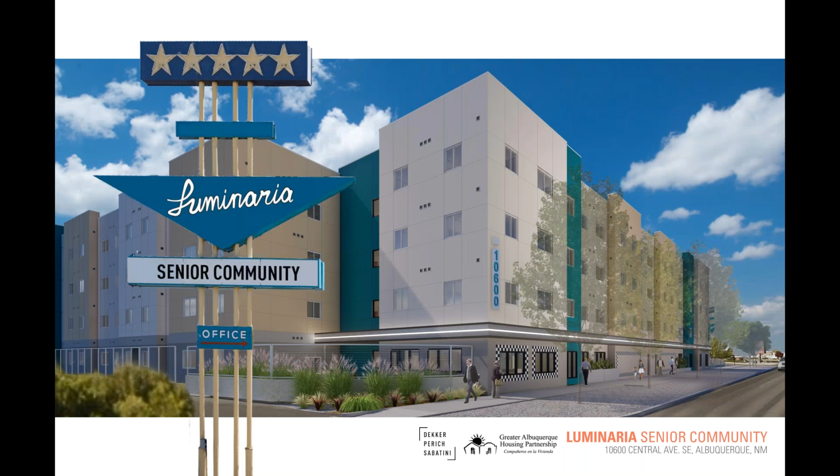Architectural, structural, interior, and landscape design was all provided by Dekker Perich Sabatini, with a long history of involvement in community affordable housing projects across the state. We're honored to be a part of this one with the GAP. My name is Hannah Greenhood, and I'm an architect with DPS. Again, honored to be here.

Civil engineer Isaacson and Arfman, Green Rater and HERS Rater, the Green Insight, bringing a LEED for Homes Platinum certification, along with a HERS rating below 55. Electrical engineering provided by AC Engineering, and mechanical engineering provided by NP Mechanical. A true collaboration amongst owner, architect, contractor, and the full design team throughout the entire process is the only way to bring us to today.

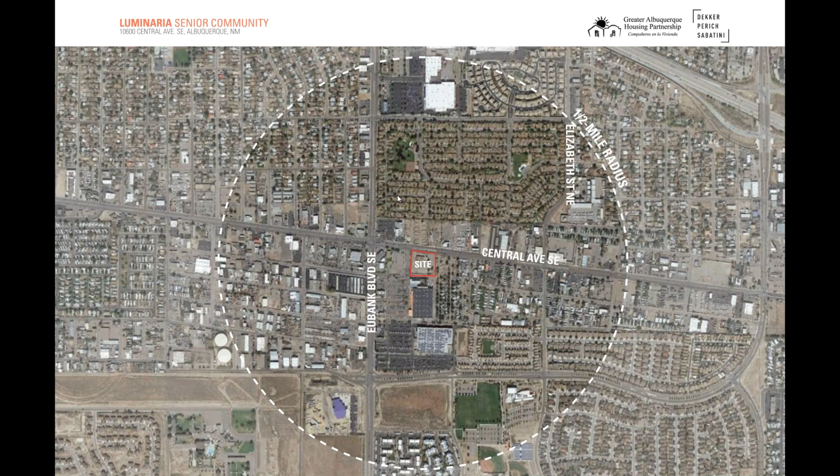On your screen is a graphic of the location of the site, Central and Eubank.

Most prominently, the adjacency to Central Avenue was a huge driver of the design of the entire project. An L-shaped 4-story wood frame building of 92 dwelling units lines and creates an interior parking court incorporating both visitor parking and a secured resident parking area.

Key features of the parking include added accessible parking spaces and a waiting and loading area allowing for pickups and drop-offs at ease, which is critical for this type of project with a resident population who may be in need of a bit more support for pickup and drop-off.

The site itself is flanked by 3 key site amenities: an entry courtyard, a community courtyard, and a dog park. All 3 of these elements are along an accessible walking path that goes through the building and outside of the building, encouraging active participation in physical body movement.

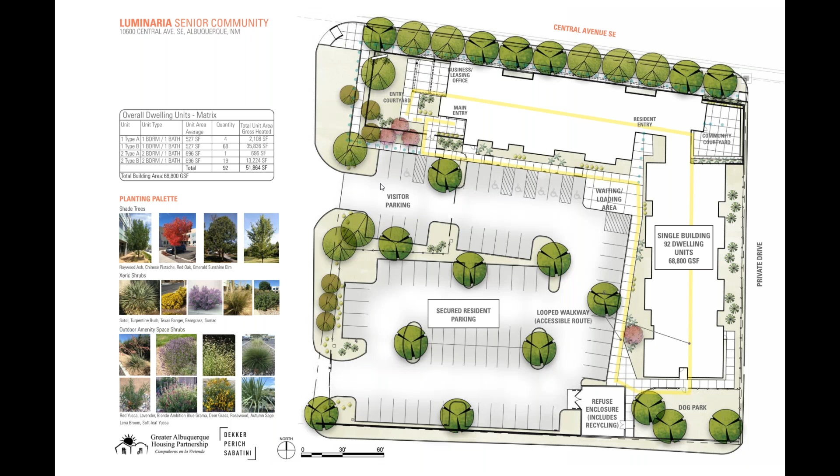Along the interior, corridors are lined with rails for that extra added support for a population in need of a little bit more support. A little bit more into those courtyards.

The northeast courtyard is the community courtyard that is overflow from a central potluck room that we'll see in a little while. The key feature there are uplit seasonal fruit trees along a circular outdoor patio with accessible movable furniture.

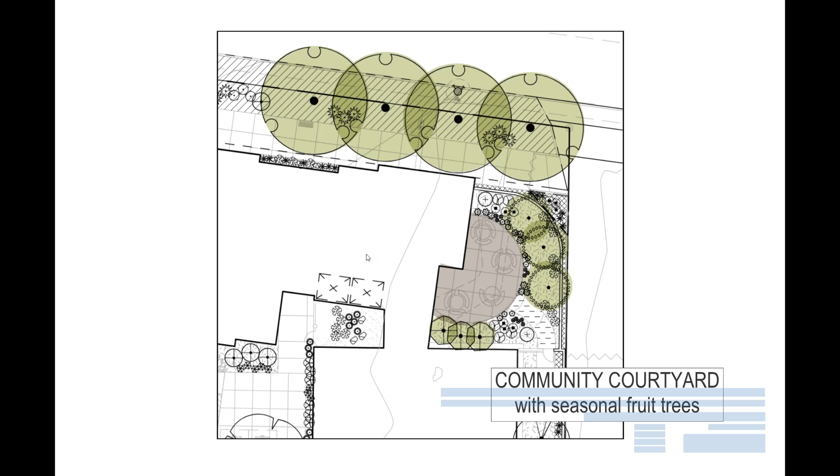For outdoor gatherings, on the opposing side, an entry courtyard with a loop trail that incorporates a therapeutic garden. Along that loop trail and along the entire site are opportunities for a moment to pause and rest with bench seating and shade, a really key component to the development of a senior community.

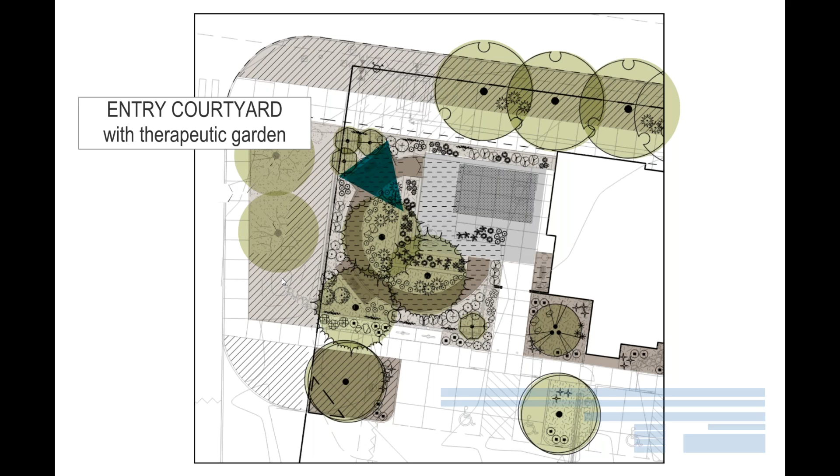On the outside of the building, that prominent Central Avenue face with deep roots into Route 66, trying to bring to fruition everything that the East Gateway neighborhood is trying to establish and bring back to this area.

Key components like a horizontal LED neon-like lighting strip will allow for some of those iconic images to be returned, but also to add some added lighting along the street front, encouraging people to walk down the street and engage. All of the amenity spaces line this front area, trying to activate Central Avenue for pedestrians walking by.

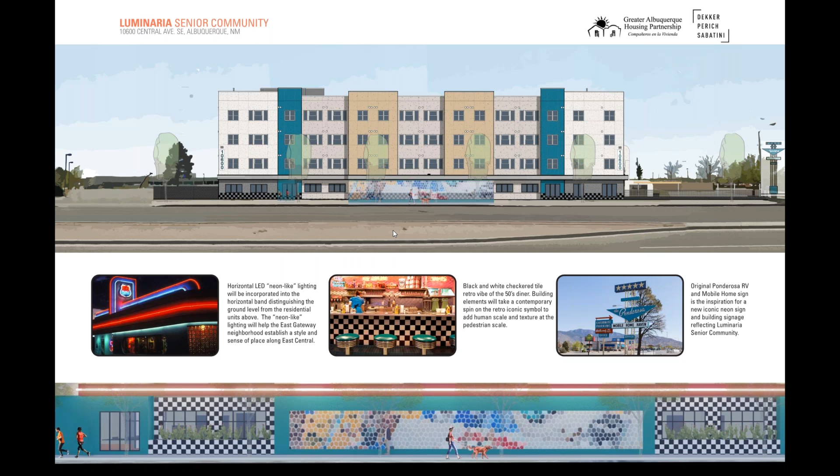Going into the building, as mentioned, amenities line that Central Avenue core with everything from a leasing office to fitness room, bike storage, and most prominent, a potluck room, which allows for overflow from the food pantry that's incorporated on site and also overflows into that community courtyard that we saw earlier.

Potlucks are a key component of the Greater Albuquerque Housing Partnership's community development. So this space would allow for residents to gather and members of the Greater Albuquerque Housing Partnership community to come together as well, with one of these great events coming together over food.

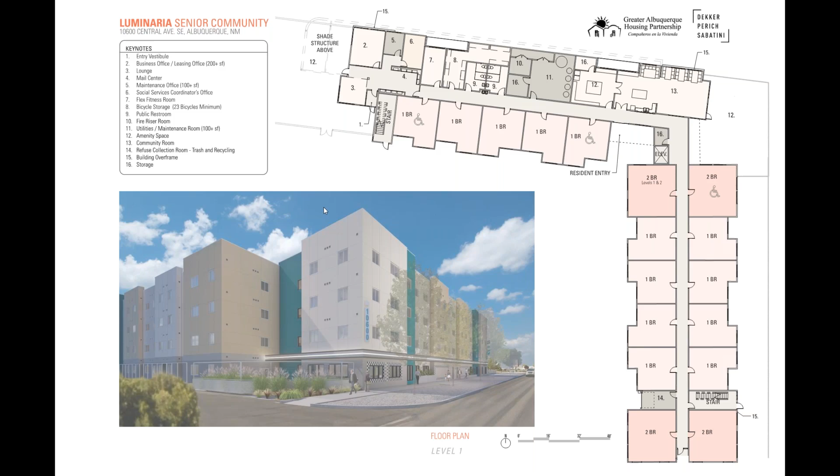Going into the unit plans, universal design is a key component of this entire project. All of the units are designed with this in mind, with adaptability, accessibility, and inclusivity into every single dwelling unit, not to mention the sustainability features incorporated to hit a LEED for Homes Platinum rating, including water efficiency, energy efficiency, and beyond.

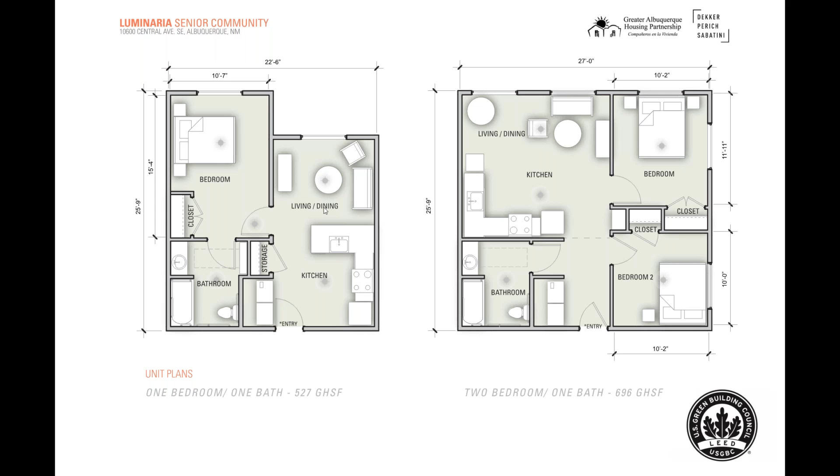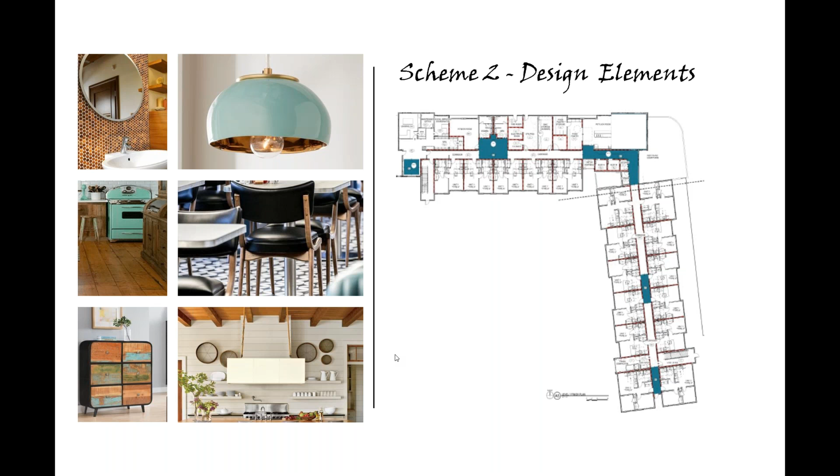A look into the color palette and the strategy behind the interior design. A journey along Route 66 is the inspiration, with color palettes and materials shown on your screen reminiscent of the Route 66 path, highlighting the 4 locations along Route 66 that you see in front of you as a wayfinding tool from floor to floor, at each level through photos and other elements at key locations as you see on the screen in front of you.

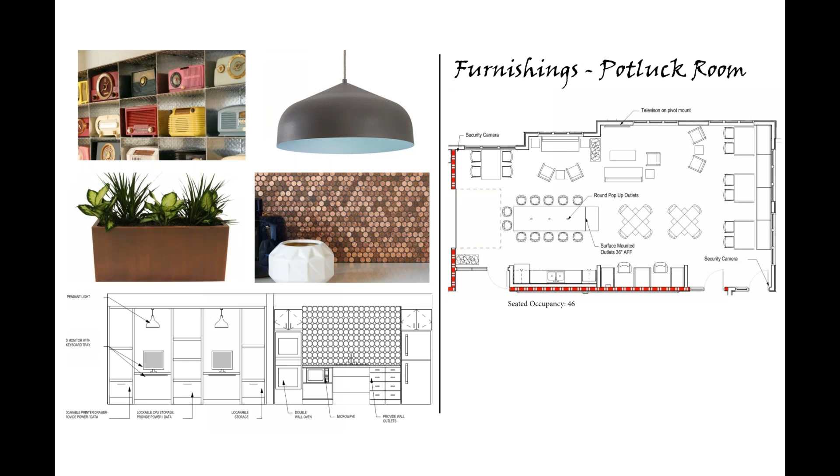Ending with the potluck room, as mentioned, a heart of GAHP projects with a focus on places for residents to gather and come together, bringing in that Route 66 1950s diner feel with a contemporary spin, incorporating a business center and bar top seating to bring much needed amenities to residents and share in community gatherings around their iconic potlucks.